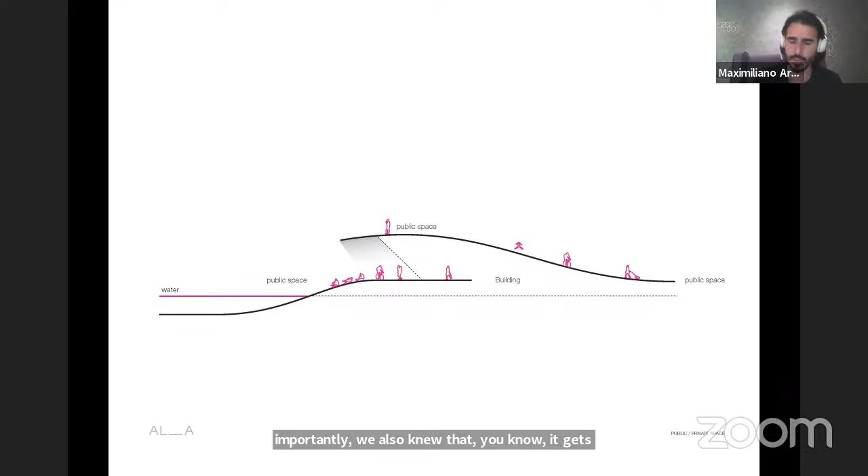But at this stage, there was still something lacking. As we started looking at the project as a topography, it was clear we had to create a diversity of public spaces. One elevated area that could give extraordinary views to the river but also back to the city. But more importantly, we knew it gets pretty hot in Lisbon, so we needed an area of shade, where people would just slow down as they were walking beside the river.

Some of these diagrams helped us understand what we were trying to achieve, and some things were very abstract. How could we capture the light? What was the relationship with the water? There was a clear relationship with views we wanted to address, connecting to the other side of the river, but also back to the city. And clearly there was an issue about circulation.

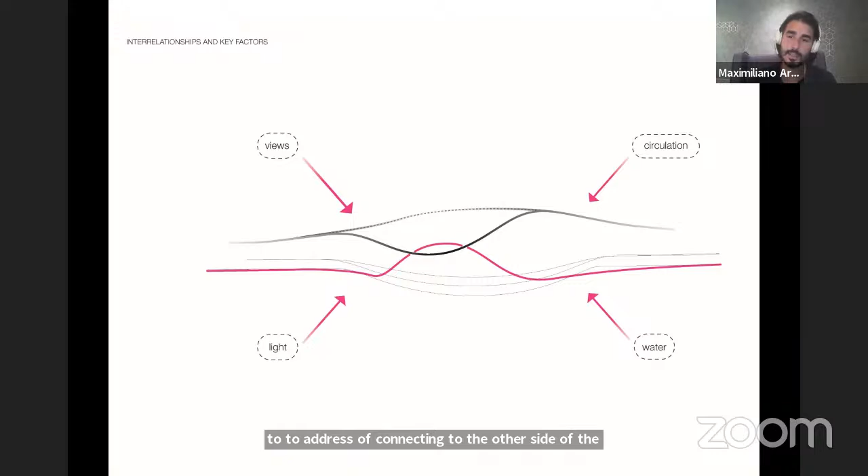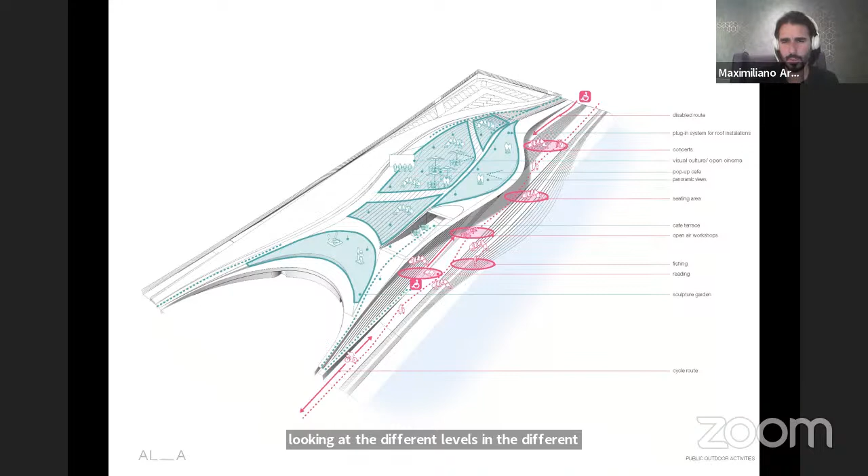We needed to connect the river not only from the top, along the riverfront, but also back to the city. So we started identifying how this could manifest itself, looking at different levels and different geometries, and how the public could start using this. This was before we even started thinking about how the interior of the museum would express itself.

This was one of the images we did at the very beginning. There was a vision of perhaps having an outdoor amphitheater that could even project back to the city, with outdoor cinemas in summer. And at the bottom, at a different level, there are binoculars where you can actually see into the gallery.

Some of these images were still very abstract, and we were trying to understand how to make this a reality, a project that would really consolidate and create a new public place, bringing this area to a different dimension.

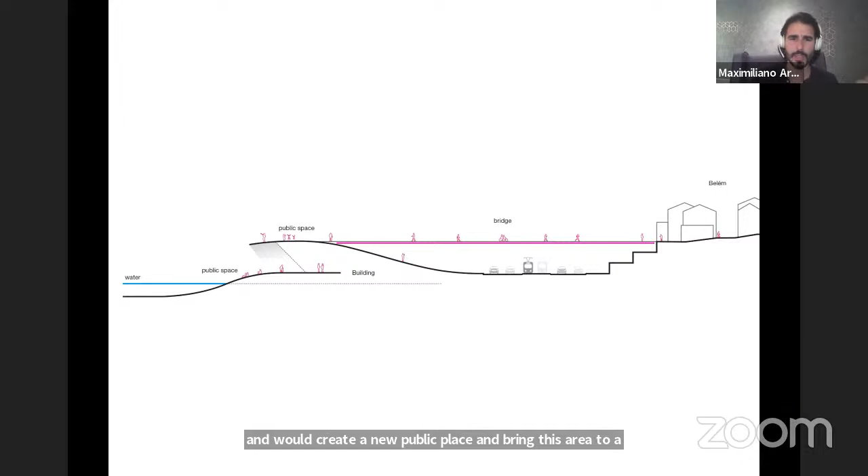I highlight here in pink because at some point we realized the project would not work unless we could make a direct connection using a footbridge to the city. That meant that from the city, at the same grade as you were navigating down the little streets of Belem, you could walk up to an elevated platform. This was really key.

We had to convince both the city and the client. At some point we had to go back to the client and tell them: look, I know you haven't asked for a footbridge, and it will probably make our limited budget even more limited, but we do actually need to try and do this.

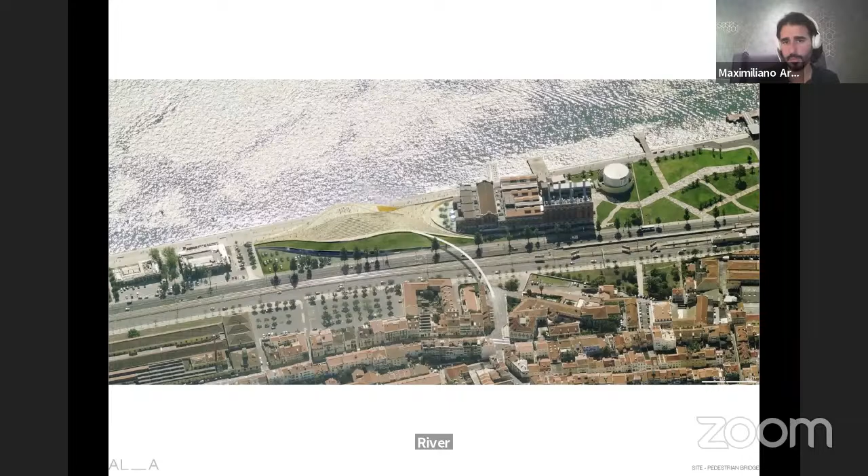So the photomontage then evolved, and then it started to make sense. It started to create a river walk that would connect the city from north to south, but also we would have a direct connection to Belem. So this is an image of the building when it was nearly complete.

We didn't want to do that for several reasons. One of them is because the neighbors behind in Belém had a view to the river that we didn't want to be an obstacle for. But it was also critical to maintain that height so that we could have ramps to access from the river up to that elevated amphitheater or square.

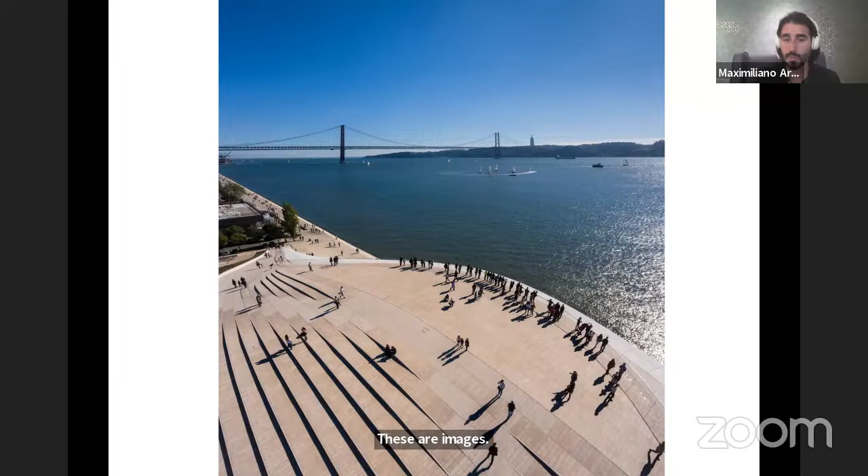These are images of the project completed, and you can see how when you're at the rooftop, you don't really understand that there is a building underneath you. You access this public space, you can see the views towards the bridge, and this is how people started to occupy the space.

So I think one of the successes of the project is that emotionally, it has connected with the people of Lisbon. It's a place where they can go and see the sunrise and the sunset. There's something very particular about being able to see the sunrise and sunset as part of a larger community.

And the steps truly act as an amphitheater. In this case, when you're not looking towards the river, you're actually looking back at the city, and you have these beautiful views of the palace.

Here you can see some of this, this is kind of like the experience that you have. So you're elevated in somehow, and the building connects in both directions. So it's a virtual roundabout, if you want, from a visual perspective.

So this plane was very important, and in this picture from a drone, you can actually see how the bridge connects into one of the main streets in Belém, and how it suddenly all starts to make sense, and how now the city starts to reconnect down to the river. It has truly activated that part of the riverfront.

So this leads to the next topic I wanted to touch today. We did a topography—you don't really understand there's a building underneath you. The materiality, well, you can see it in the images: it's a green roof that then uses the same stone that is used throughout Lisbon.

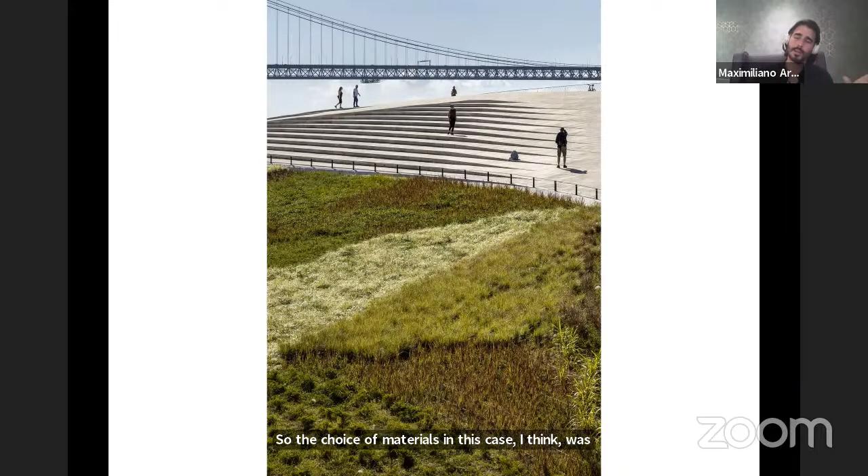This is an image of the bridge, and this is a picture of the opening day. We actually rented a boat, and we couldn't believe our eyes when we saw how many people went to the opening of the museum, and how they occupied the building exactly how we had imagined it.

It was truly a special moment for the office, because sometimes you project how you think people are going to behave, and you work so hard into trying to create public spaces, but it's not an exact science, and it's difficult to measure in many ways. Sometimes you really need to understand the locals and what they expect.

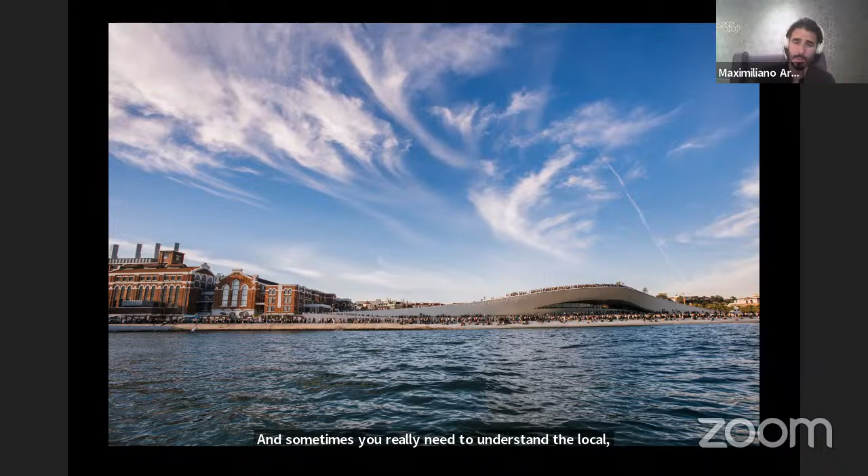In this case, most of these people were not an international kind of audience coming to the museum. They're actually people from Lisbon, particularly because at this stage there was no collection. So literally they just went to see an opening of a building with no art collection at this point.

This is a picture of one of the footbridges that we had close to it, and they actually had to close the footbridge because so many people wanted to access it. The reason this happened is because when the building was opened, the footbridge came 6 months later. So the building existed without the footbridge for 6 months, and this was one of the cause and effects of not having the footbridge in place. This reinforced our notion that yes, we did need a new footbridge.

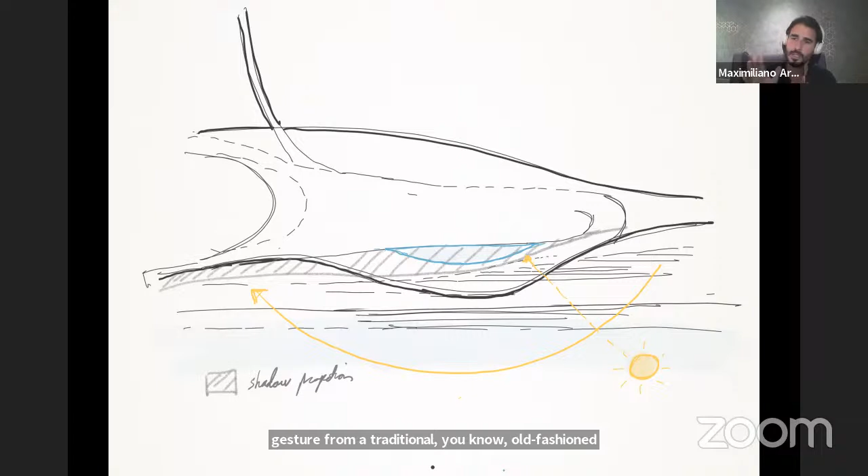Many times I get questions about the geometry of the building and how it was derived, and it's not always apparent unless you explain it. But the building was not derived as a gesture from a traditional, old-fashioned kind of architect saying 'I want to do this kind of curvature.' The geometry of the building was carefully calculated using a sun path diagram and the solar movement.

And what we did is we created software that would allow us to understand the shadows. So we would draw all the shadows, and we started sculpting shadows.

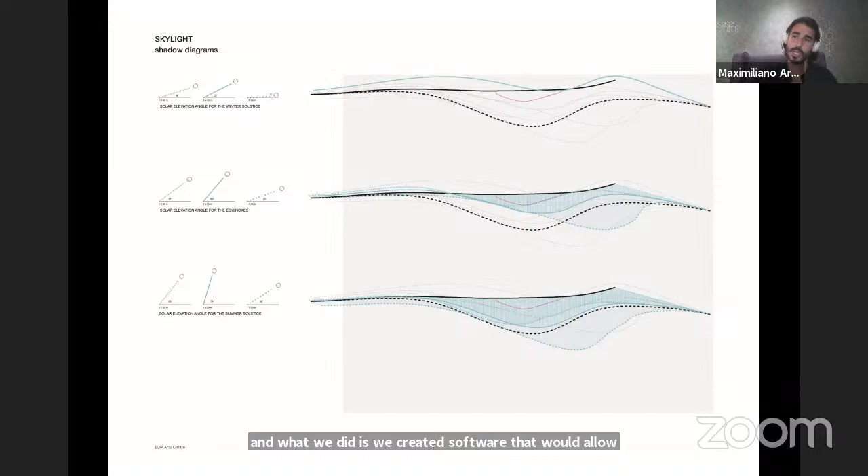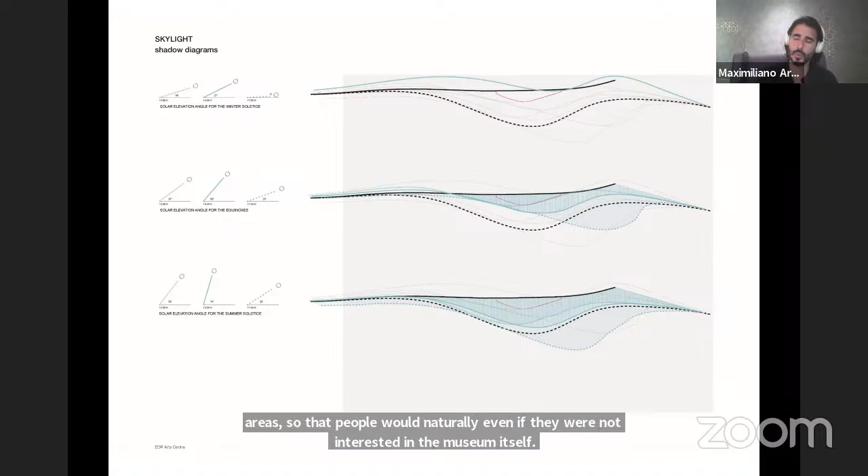And so the public space that's at the level of the Riverwalk, we wanted to create an area of shade, an area that was cooler than other areas, so that people would naturally pause, even if they weren't interested in the museum itself. We wanted people walking along the riverfront to suddenly find an oasis of shade, and then there's an oculus that I'll show you later where people can see into the gallery, and hopefully they will go inside the building.

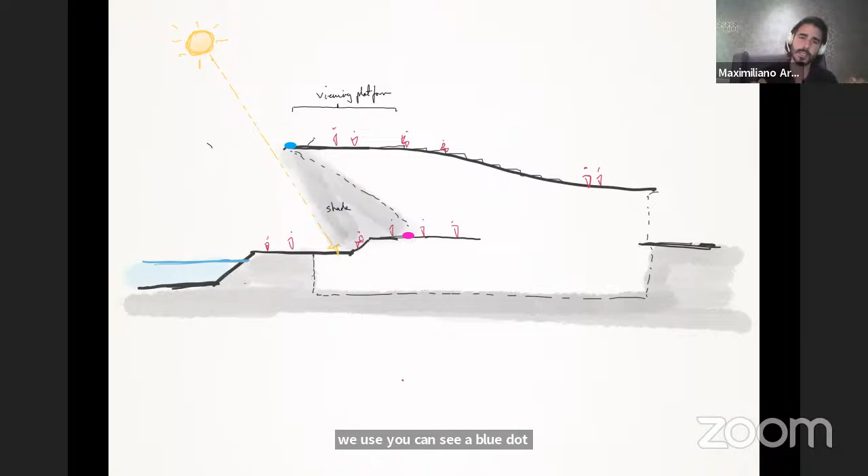So the geometry was really based on the orientation of the building. It's south facing, so by having a horizontal overhang, you create shade, and in that area of shade we started sculpting shade, and that's where we decided the entrance had to be. To generate the geometry, we used a blue dot at the top, the tip of the building, and a magenta dot at the base, at the entrance of the building. The entrance is elevated because the river can flood, so it had to be at a certain height to avoid potential flooding of the area.

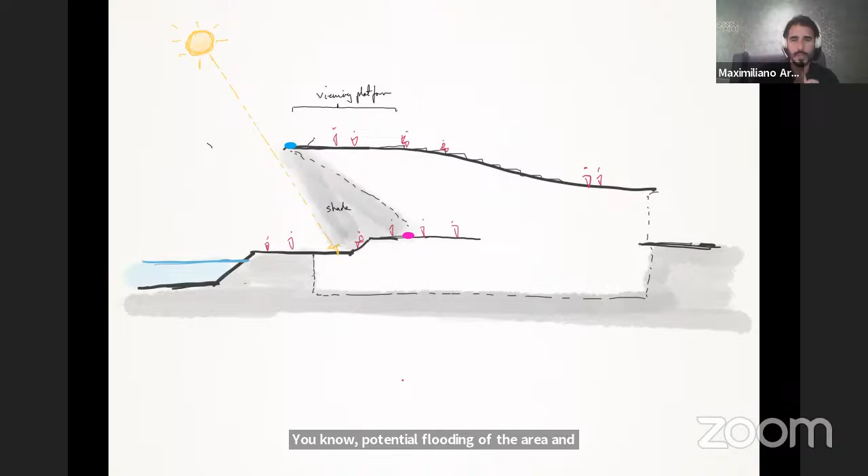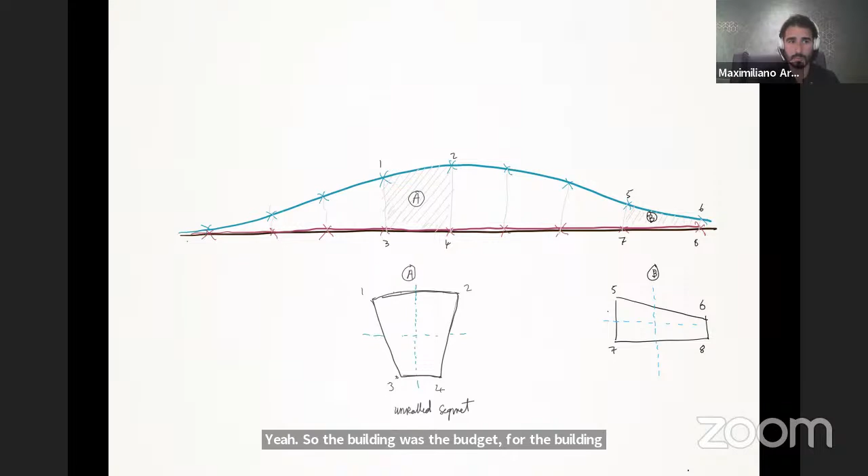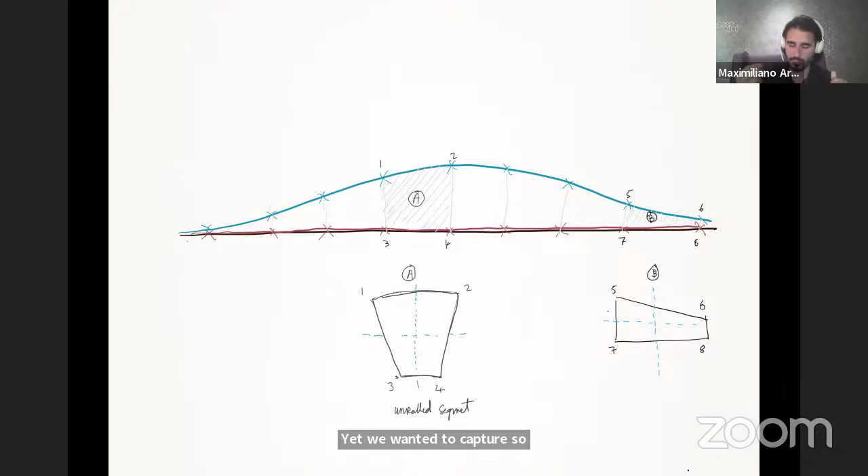This is just to show you the blue line I was showing you before. One of the challenges we had is we had a very limited budget. The budget for the building was approximately 20 million euros, which ended up being around 2,800 per square meter - very low for an international museum. So we were very limited, and we knew from the start we had to come up with a facade solution that was simple, yet we wanted to capture so many aspects of the light quality and the reflection of the river.

So our journey starts with understanding the easiest way to fabricate or generate this geometry. It was evident from the beginning that we had to create a ruled surface, which would allow us to use a series of straight lines, which I'll show later, to come up with a tiling system that would help us articulate everything we wanted to do.

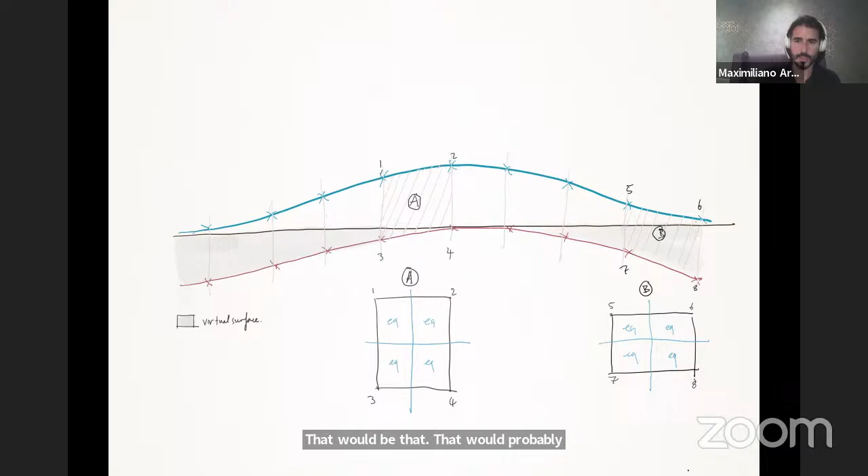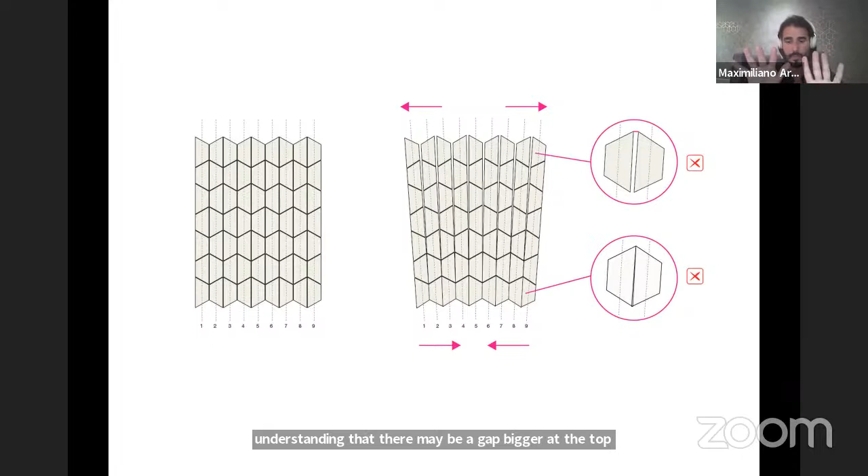Once we generated the ruled surface, we realized construction is not precise, so we had to look at what deviations we might get. We also have a steel structure and a concrete structure, so they move slightly differently. We had to think about the gap between the tiles - there may be a gap bigger at the top and smaller at the bottom - and how to mediate all these differences as we looked at the different geometries we could generate.

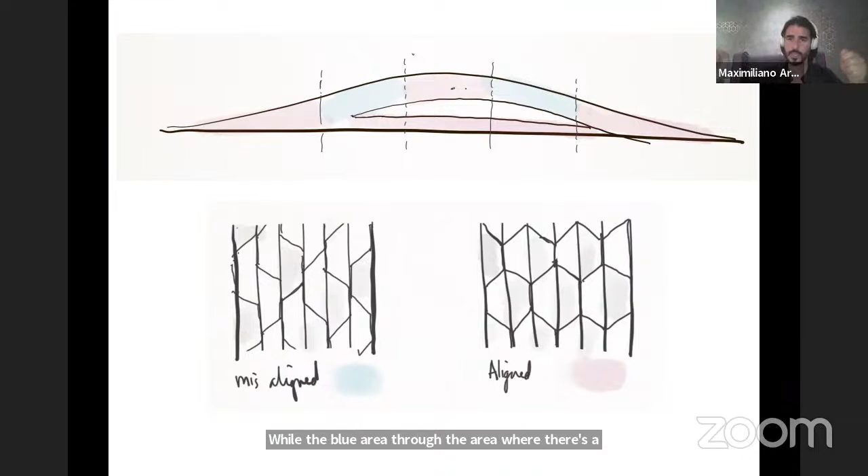The other thing we understood is that the pink areas in this diagram are areas where the pattern is quite aligned, while the blue areas are where there's a transition, where the ruled surface is more pronounced, so there was going to be a deviation in the pattern. We actually enjoyed that - we thought that would be great, because the tiling of the facade could start to mimic the reflections of the water.

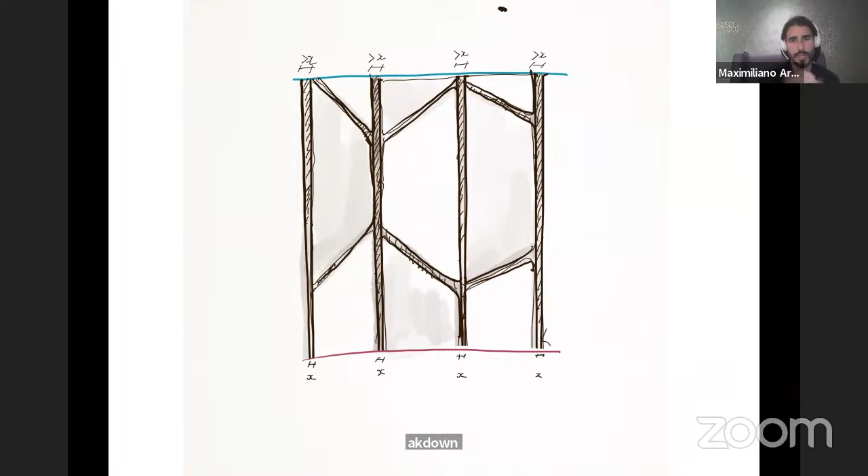So we opted, at the end, for a hexagonal pattern. The hexagonal is obviously based on breaking down the hexagon into equilateral triangles. We did study the option of doing triangular breakdowns using an equilateral triangle, but at the end we opted for breaking the hexagon in half and doing an asymmetrical hexagon, a three-dimensional shape that would also allow us to play with the edge.

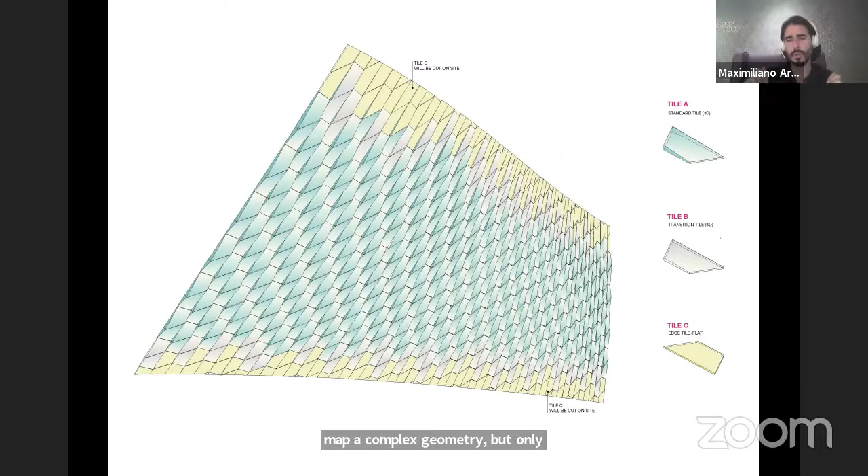We worked quite hard to come up with a system that would allow us to map a complex geometry using only 3 tiles. We didn't have the budget to do 1,000 different tiles - we had a budget to maybe produce 3 molds. So in this case, what you see here are 3 types of tile.

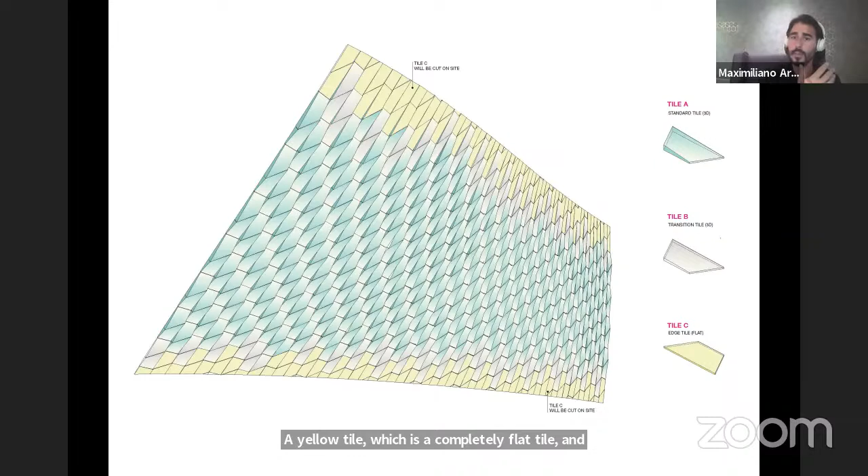The blue tile is a 3-dimensional tile with around 65 millimeters in depth. There's a gray transition tile that goes from the 3-dimensional tile to a yellow tile, which is completely flat. The blue tile and the gray tile are manufactured in a similar way, which I'll show you in a bit. But the yellow tile is a cheaper tile, manufactured using an extrusion mold, which I'll show you in a second.

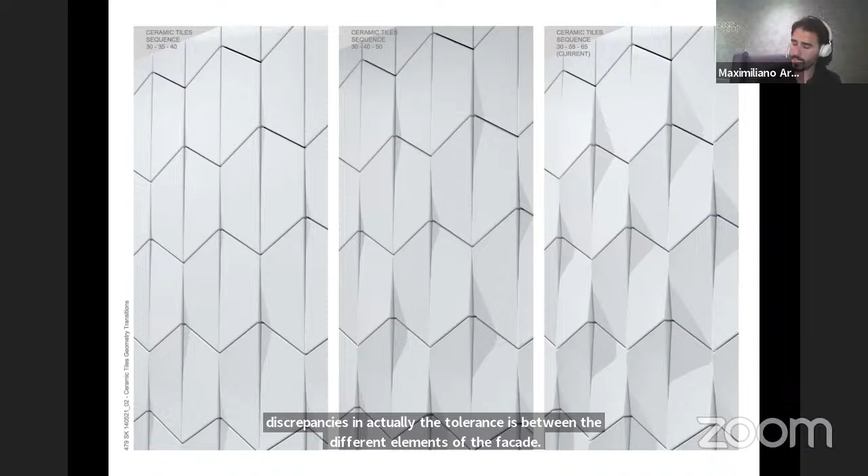The next question we started asking ourselves is, well, we need movement in this facade, because we knew there were going to be discrepancies in the tolerances between the different elements of the facade. So we wanted to exaggerate the three-dimensionality of the facade. Also, because of the orientation of the building, each tile nearly acts as a solar dial.

You can map the shadows, and they create completely different options. So this is a test we did using how three-dimensional we want the tiles, and we opted for the third option, which is the one to the right, the most extreme kind of tile.

So then the question is, well, okay, how do we make these tiles? That was a journey that lasted 2.5 years. We immediately thought of ceramic tiles, because most of the vertical facades in the city of Lisbon are in ceramic. So there's a very strong relationship to the city in using ceramics, and ceramics actually behave very well in this kind of environment.

And ceramics is a universe in itself. The first thing we decided is that we needed a non-porous ceramic. So instead of going for terracotta, we went for stoneware, which is, if you want, in between. It's terracotta, stoneware, and then you have porcelain. Stoneware is still a ceramic that is vitrified, so it's fired in the kiln at around 1,200 degrees Celsius, and goes through a process of vitrification, which means it's a non-porous ceramic.

Unlike terracotta, it's non-porous, and it's important that it's non-porous because it does actually freeze. You can get the odd day in Lisbon where it goes below zero, and then any humidity trapped in the terracotta could make the tiles crack. So it was important to use a non-porous material.

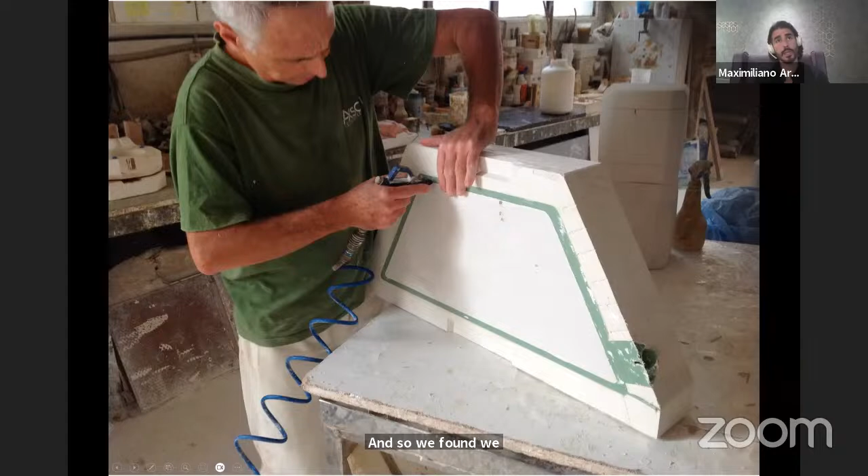We searched everywhere in Portugal, and we couldn't find a company that had the knowledge to create tiles of the dimensions we wanted, because it was important for us to have an oversized tile because of the scale of the building. So we ended up working with a Spanish company, neighbor to Portugal, a family-run business, fourth generation, and they still to this day produce a lot of the ceramics used in the Sagrada Familia, following Gaudi's tradition of ceramics. So they had true knowledge about the material and what they could do with it.

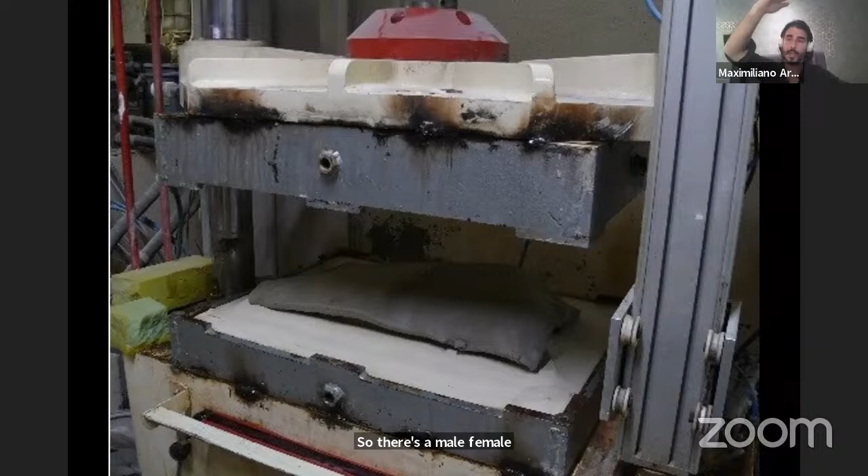This is a picture of one of the molds, the three-dimensional tile molds that we created. And the fabrication process you can see here is we ended up having to use a stamping method. So there's a male-female mold, and then the clay, if you want, is stamped, and this is more or less what you get.

What was interesting is that we realized very quickly that when we left it drying and put it in the kiln, it would deform. Obviously, we then had to come up with a system to support the tile.

So we had to create another type of ceramic, in this case a porous ceramic that you would use as a support. We would first stamp the tile, then put it on top of one of these supports, and then it would go into the kiln and we would fire it. These are some of the pictures of the molds we used to create these three-dimensional tiles.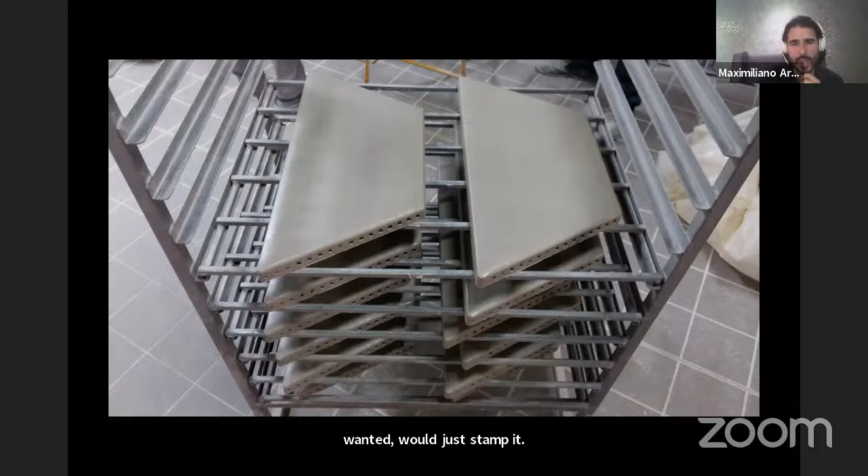So these are the two types of tiles that we had. And these are some of the mock-ups we did, just to start experimenting with different tonalities and different qualities we could find.

We were quite certain from the beginning that we wanted a white tile, but the client wanted us to explore other tonalities. So a lot of these tests were to demonstrate to the client that the quality of light we could get with the white tile was more interesting, because it would simply reflect what was happening around us, while adding any other tonality meant using colors that are recurrent in this area of the city. All these mock-ups were just to demonstrate to the client that our instincts were correct. Sometimes you need to go the long route until you find the right solution.

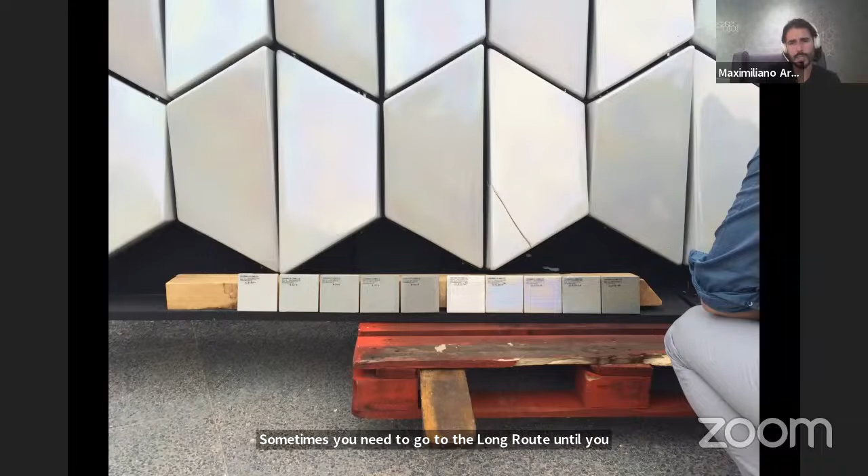Here you can see a wide range of different tests to understand what white we wanted to achieve and what kind of different reflection. Again, these are two different options. One was a white similar to the stone used in the pavements around the city, and the other was using a dark clay with a white glaze.

Ultimately, after all of these tests, we opted for this one. The reason we chose it is, one, it was off-white but slightly earthy, so it had a dialogue with the stone used in the pavements. But what we really enjoyed was this crackle effect. When the light hits it, and because it's south-facing, as soon as you get close you start understanding there's different depth in the ceramic. This is something quite unique that's difficult to achieve with any other material. Every piece looks like it's handmade, and we thought that was very interesting.

There's something fascinating about also accepting that the tiles are not perfect, that there are small imperfections about them. It creates a certain richness in the project. It was important as well for the tiles.

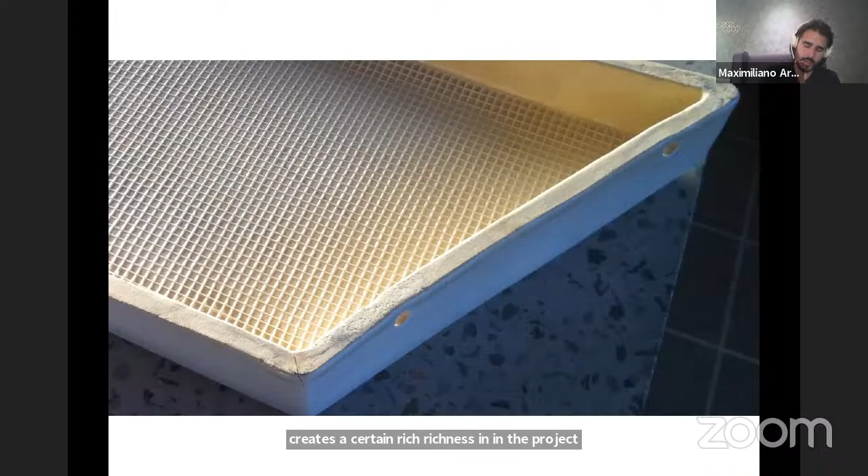We had to go through extensive testing for this system because the tiles started vertically, as they do in any facade, but then the building was twisting, so it was acting nearly more like a soffit. We had to make sure that in case there was a breakage of one of the tiles, it didn't just fall on someone's head. So this is a fiberglass backing that we needed to add to the back of every tile.

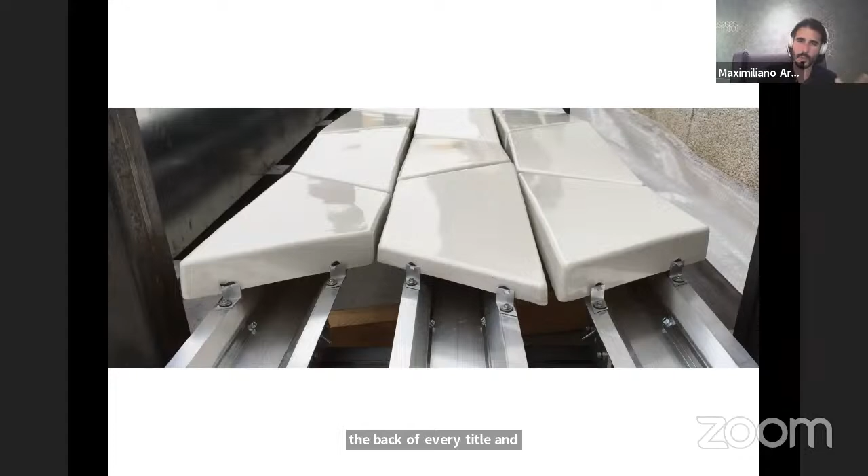This is one of the mock-ups of the system, how we decided, we did different tests on how the tiles could be mechanically fixed to the aluminum structure behind it. This was the most successful one, so this is the one we ended up pursuing at the end.

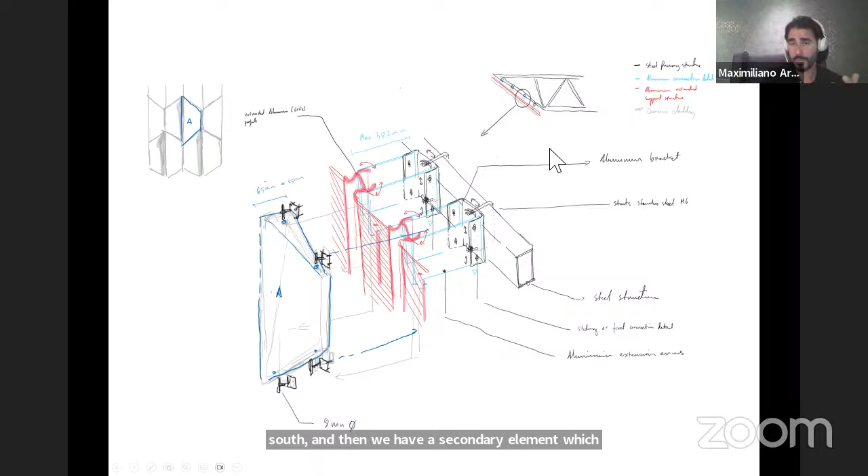There's an added complexity to the project, which is that we had to deal with the different rhythms of the building, which I'll explain. We have a primary structure, which you can see here - big three-dimensional truss structures running north-south - and then a secondary element, an aluminium element, which picks up the facade. The arms are of different lengths, and then we would hang the tiles.

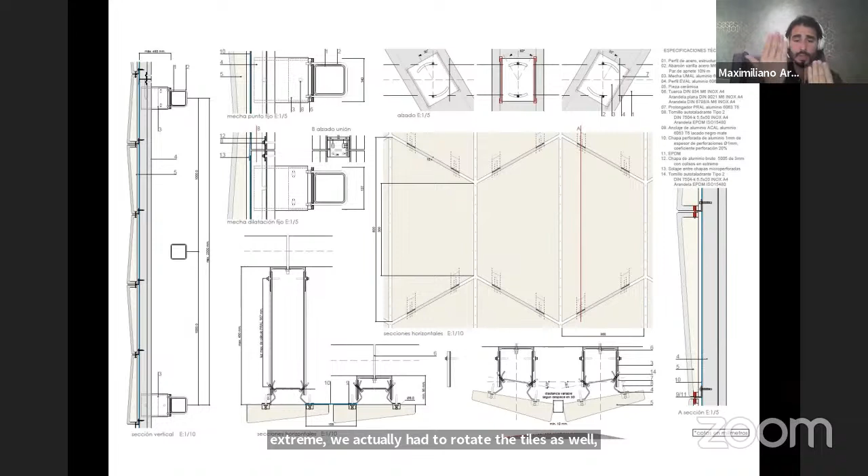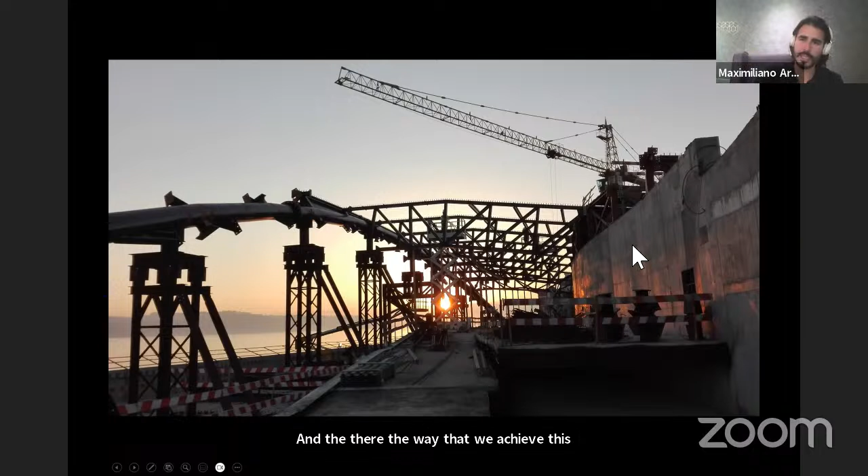I think it's easier to show you in photographs. This is the rhythm of the steel structure. We managed to create a building that effectively has no columns, and the way we achieve this - you see a concrete wall here. That concrete wall is part of an elliptical concrete structure which forms one of the big elliptical rooms, the main room of the museum.

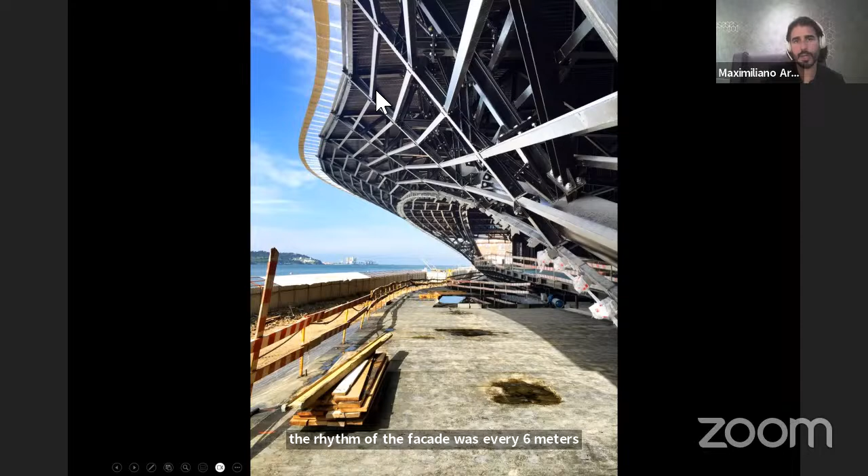Then you can see here we had some trusses spanning to a tilted arch - these are temporary structures, removed later on. From that tilted arch, you would have an overhanging structure that allowed us to have that big overhang I'll show you in a second. The rhythm of the facade was every 6 meters, so we would use straight steel sections every 6 meters, which created a deviation between the original surface we wanted to follow, the ruled surface, and the steel structure.

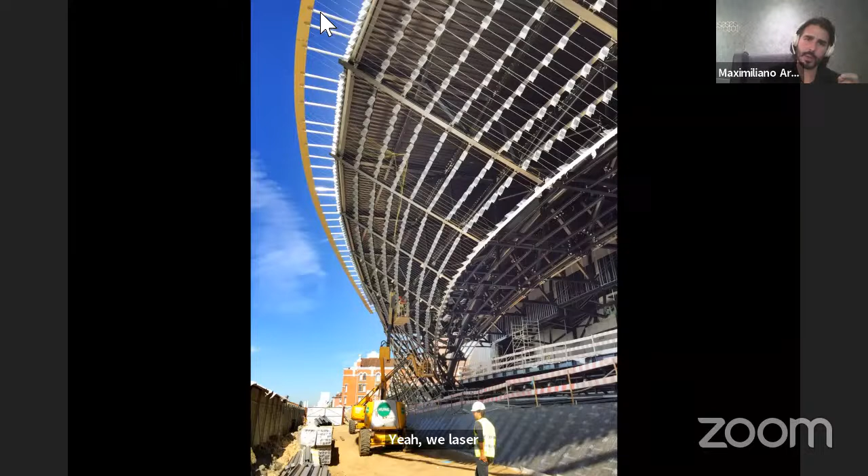So then we used, I like calling this a very low-tech way of making sure that you can build a facade in a complex geometry. We basically used those aluminum panels you see at the top here. We laser cut these, and they had the perforations at the right rhythm, and then we literally used strings to make sure the roof surface was following what we had designed in 3D.

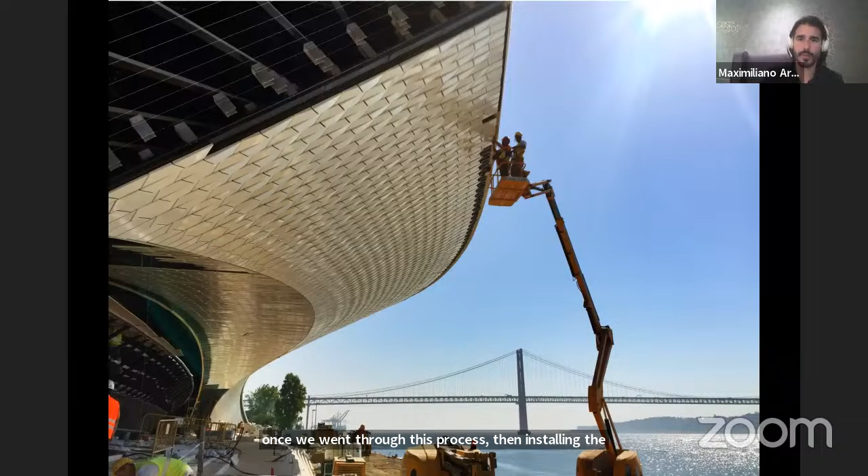And then the tiles at the top, you can see, are flat. They were cut on site. So we would take a measurement—they were oversized—and then we would cut to the measurement so that we could follow the curvature as precisely as we possibly could.

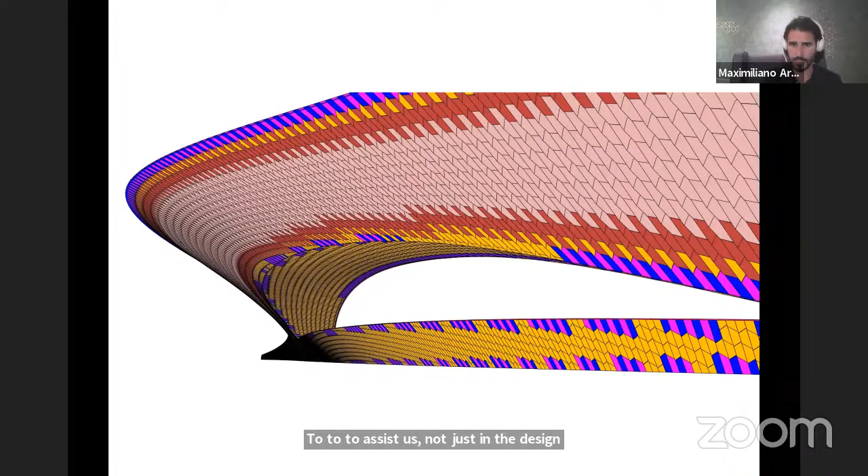We used different technologies in our office—we've adopted all sorts of them. We write our own scripts, we make models, we really use every tool we have in our hand to assist us, not just in the design, but also in the construction. So unlike many design offices, we generally are very proactive, and we follow construction throughout. We're usually on site as well, since construction is a fundamental part for us.

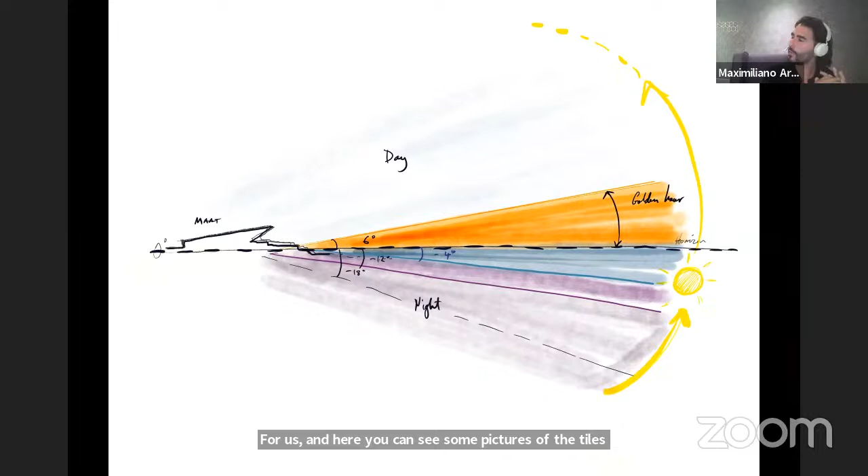And here you can see some pictures of the tiles as they were installed. And I like this diagram because it's a diagram that we did—it's not 100% scientific, but we developed it by simply being on site and observing what was happening to the light.

We traveled to the city for 7 years, so by the end of the third or fourth year, we had a really good appreciation of the colors we were getting. There was this 6-degree angle, which was the golden hour that happened in the mornings and evenings. And then there was a moment where the sun went below the horizon but you still got this blue tint, this very bluish facade, and then it was nighttime, and then you would have the daytime.

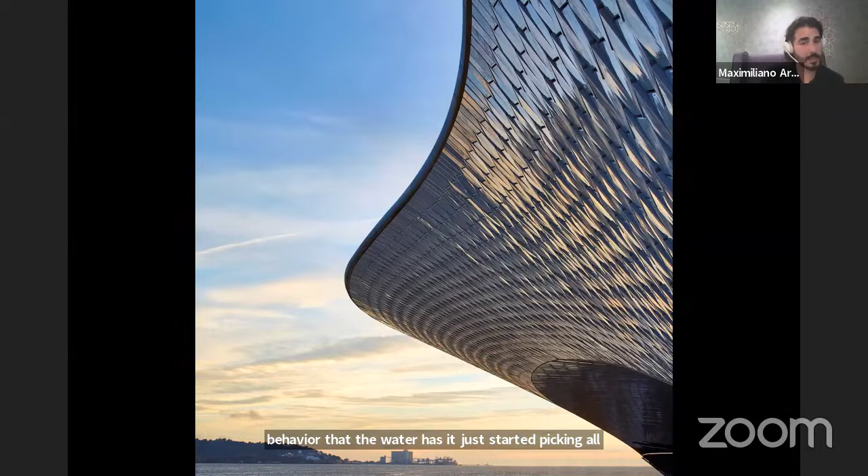I think these photographs demonstrate that we were able to capture all of these different colors—it's effectively mimicking the same behavior that the water has. It just starts picking up all the colors of the sky. Sometimes people pass at different times of day, and I've received calls from friends saying, oh, I saw the museum, it's great, I love that you did an orange building. And I tell them, no, the building is white—it's just that you happened to be there at a specific time. Other people tell me it's a beautiful silver building. It just really changes.

And I think the project was quite successful. We tried to capture what the river did, and we found a way of capturing all those kinds of qualities that you get.

And then another element that we didn't really design, but it just happened—the geometry that follows the sun at a specific point acts as acoustic reflectors, and there are moments where, going up the ramp towards the entrance, you can actually hear the water in a very peculiar way.

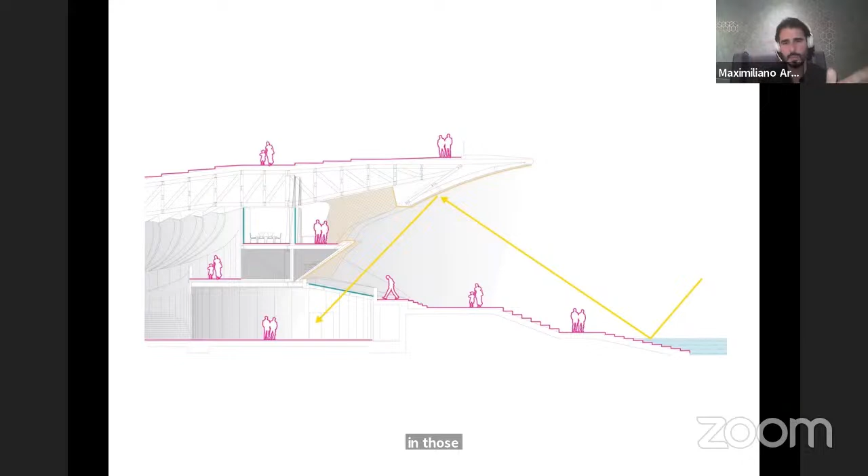I won't dwell too much on the museum interior. There are different areas that are effectively an extension of the topography, and there's this huge oval space used for all types of exhibition. It's very malleable, a type of space they didn't have in the city, so it's unique. Artists have appropriated this space, and if you look at the Instagram page of the MAAT, you'll see they've used it in ways we couldn't even have imagined. I think it's been quite successful.

I think this is the end of my presentation. Hopefully I've covered most of the questions you had about the project.

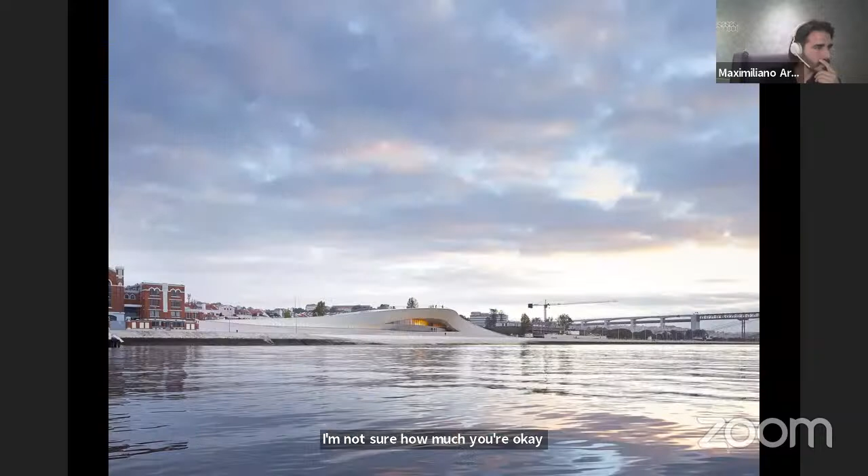What I was saying before is that Belém is not really close to the center of the city. The center of the city is considered to be where the Plaza de Comercio is. The city used to be connected to the riverfront all the way from the Plaza de Comercio to Belém. The big issue the city had when we started working on the project was a disconnection from the riverfront throughout its full extent, so it was only really touching the River Tagus at the Plaza de Comercio. This was one of many projects the city of Lisbon had in mind to reconnect back to the river, so we were another stone in that effort. There's a series of projects running from Plaza de Comercio, including the Expo area, and a lot of new projects have since been completed that have regenerated the route back to the river. We definitely helped reconnect the area of Belém and the riverfront. Beside us there's not just the MAT Museum but also the Museo de Coches, one of the new museums by Mendes da Rocha. I think our project was critical in the reconnection of the city, but it was one of many projects. The city had a plan called the Arco Ribeirinho, meaning the Arch of the River, which promoted all projects to do something similar to what we did. So I'd say we're a success story, and there were other success stories too. I think the municipality of Lisbon and its mayors have done a great job regenerating the city.

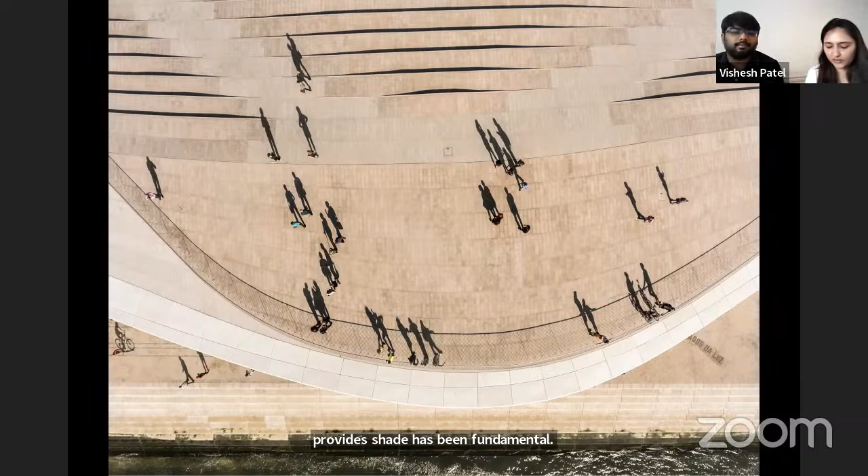How does the site attract crowds, and how does the MAT building instigate activity? What different kinds of uses and events are enabled by the civic surfaces of the MAT site?

Actually, I think part of the success of this building is that it doesn't need to be programmed to be successful. No one programs it, you don't need someone to actively program things for people to go there. People just go there because it effectively acts like a three-dimensional roundabout. If you're on the riverfront and want to go to Belem, you have to go through the roof, and if you're in Belem and want to go to the riverfront, you have to go through there. And because, as I said before, suddenly you find yourself in an amphitheater, suddenly you find places of urban comfort, and as soon as people start gathering there, it's just because it's comfortable.

It immediately creates community. I think it's a hotspot for skaters as well, I think skaters love it, and probably they're being chased off, but I've definitely seen skaters and people cycling up and down the facility. But I think the success is that you don't need to program it. The MAT, however, has had different artists having interventions outside. For example, if you see in this image, there's a floor box, it's there because we knew they might want to put a pop-up bar or an art installation. So there is the possibility of having art installations, and they have had them. Obviously when there's an art installation, it attracts people, but as I said, the fundamental success of the building is that it doesn't need programming to be occupied.

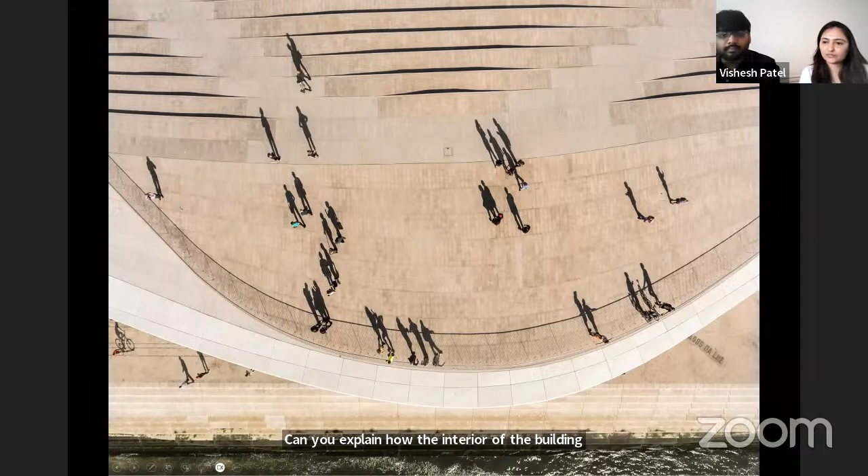Yes, and I apologize because I didn't bring any slides to show you how it works, so I'm going to have to describe it for you.

The whole project is a complex network of ramps. We have ramps to go to the top of the building, and different levels. There's the main level, the level of the Riverwalk, and then a level above the Riverwalk where we established the entry of the museum, elevated to avoid potential floods from the river. Once you get to that level, we slowly start ramping people down.

As you ramp people down, you have an option to go in two directions, and that's where the big oval kind of space starts. As you go on the perimeter of this oval shape, one is a very long ramp that takes you to the back of the oval, to the opposite side, and the other is a generous kind of stepped area.

Once you're in the oval, there are different connection points to different parts of the building. All these spaces are hyper connected, and before you know it, you're in a different level because we're using ramps.

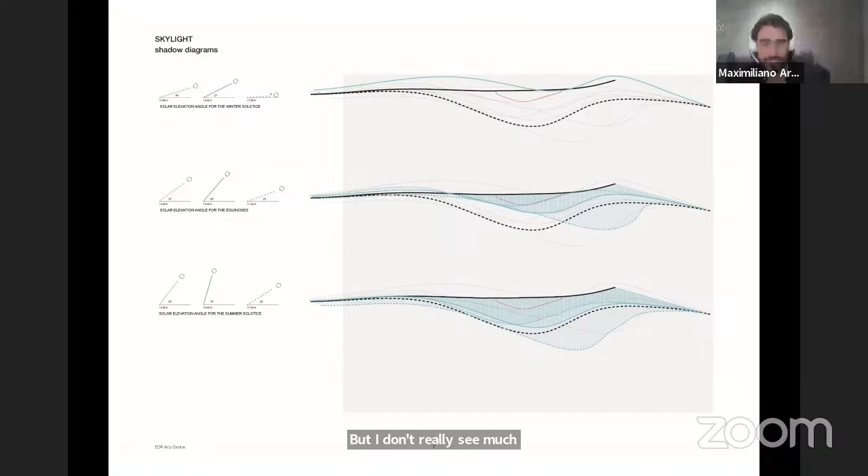And the equilateral triangle can then be decomposed, as the hexagon is decomposed into equilateral triangles. When we decided to make the shape three-dimensional instead of planar, that gave us the opportunity to use a hexagon split in half and made three-dimensional. So I think the fundamental of how you look at light and how it plays with platonic solids is actually the way that we perceive platonic solids. Most platonic solids have the equilateral triangle as their base geometry as well, so we're not really far off. I don't think there is such a thing as modern geometry versus classic geometry. I think geometry is a universal language. We probably have tools now that allow us to explore things with more complexity, but I don't really see much difference in the appreciation they had perhaps 100 years ago of how light plays with geometry, compared to how light plays in the geometry that we did in the MAT. I personally think we probably should go back to studying a lot more classic geometry in architecture, but that's a different story.

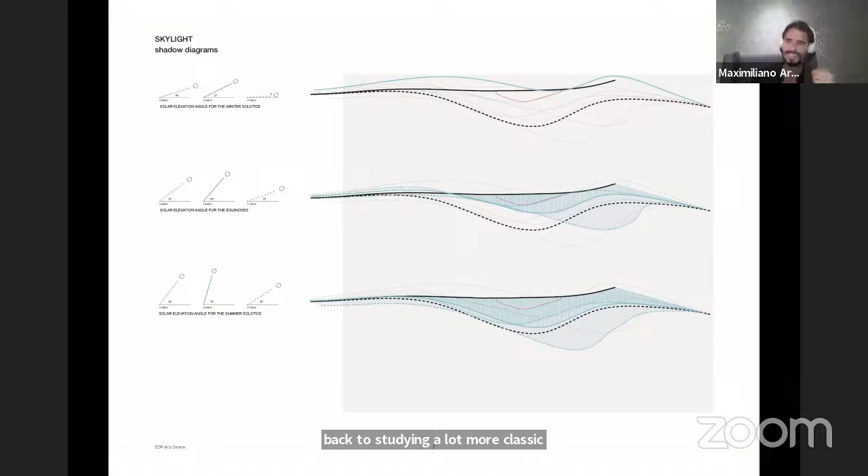Can you please summarize again the flow and movement of the sun path over a day, and how the large overhanging canopy at the waterfront has been designed to create shade and civic space in the hot summer months?

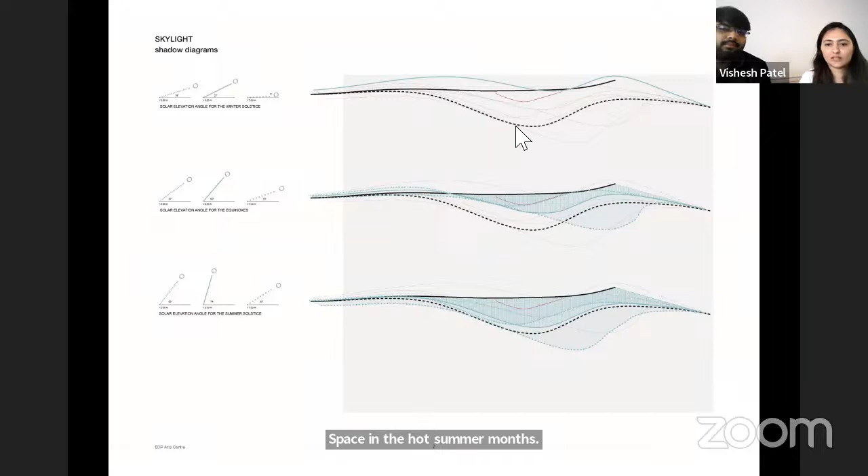I'm not sure if you are seeing what I'm sharing. Are you seeing what I'm sharing? I'm sharing the diagram with the projected shadows. Is that what you're seeing?

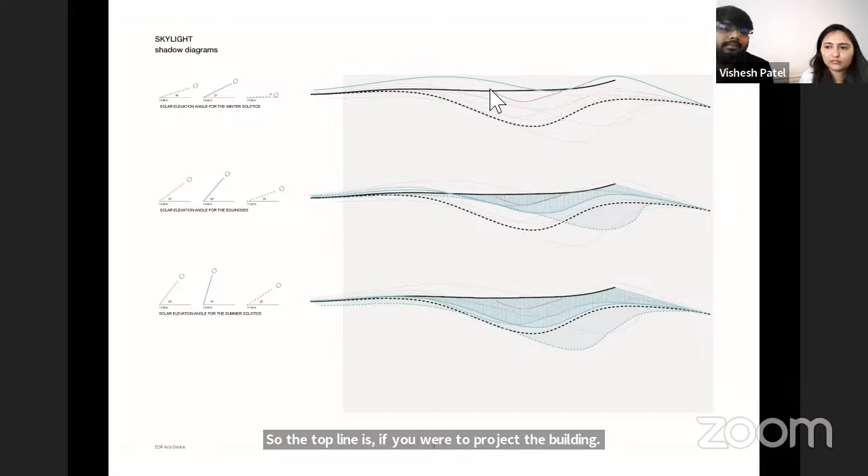So the top line is if you were to project the building, that's the entrance. The pink line here is the line of what we call the oculus, that big skylight that connects the gallery to the inside and outside. So this is a projection of those elements.

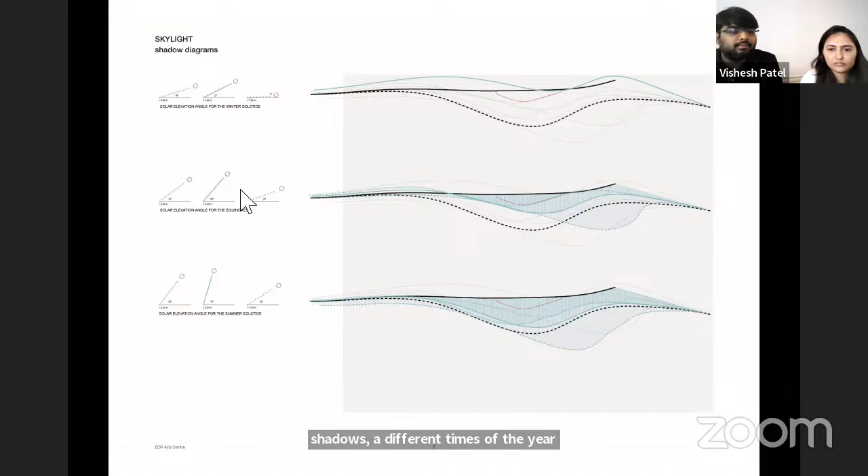What you can see here are the different projections of the shadows at different times of the year. We have the winter solstice, the two equinoxes, and the summer solstice, and you see how the shadows project differently.

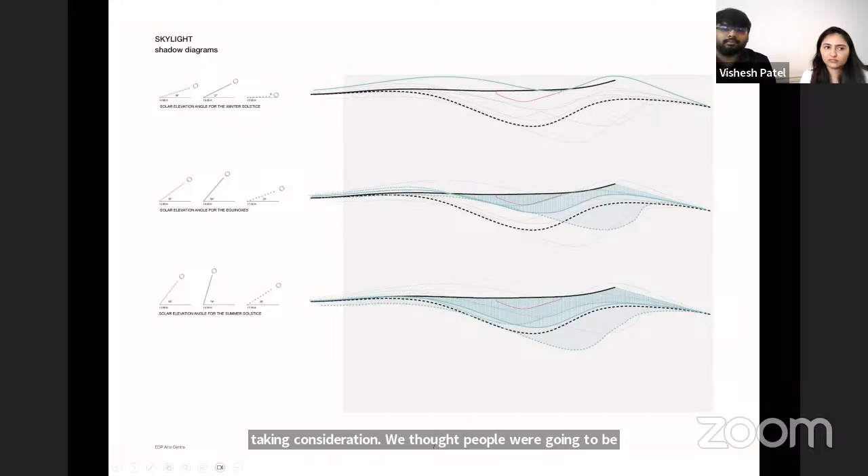The entrance is to the left, where you see the projection of these shadows. Obviously the sun goes around, but we also took into consideration when we thought people were going to be in the museum itself. So I would say that the whole front of the project was using shadows — we were sculpting with shadows, if you want, which I think is quite a poetic way of understanding how we did it.

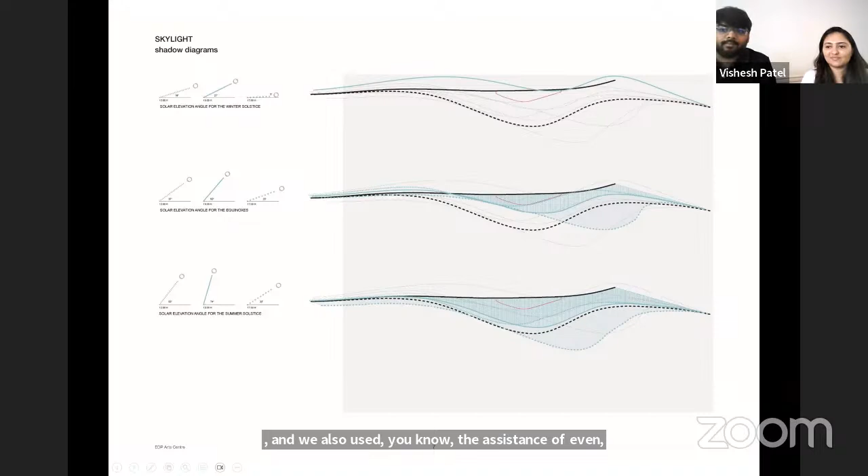And we used models, and ultimately we also used the assistance of even early virtual reality goggles to try and understand and see what we could do. But it was truly sculpted using shadows.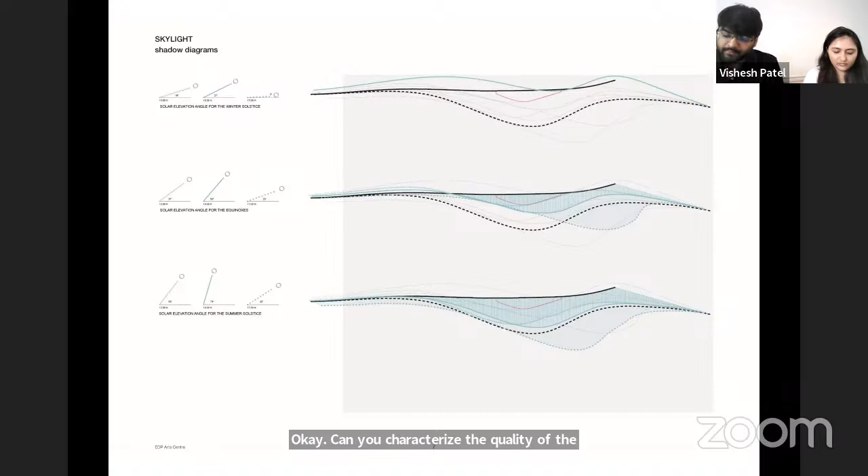Okay, so we would like to shift our discussion towards the space planning of the museum. ALA deployed the geometry of the figure of an ellipse as a space planning device. Can you characterize the quality of spaces created, and explain how the flow of crowd interacts with exhibition in these special elliptical spaces? Yes.

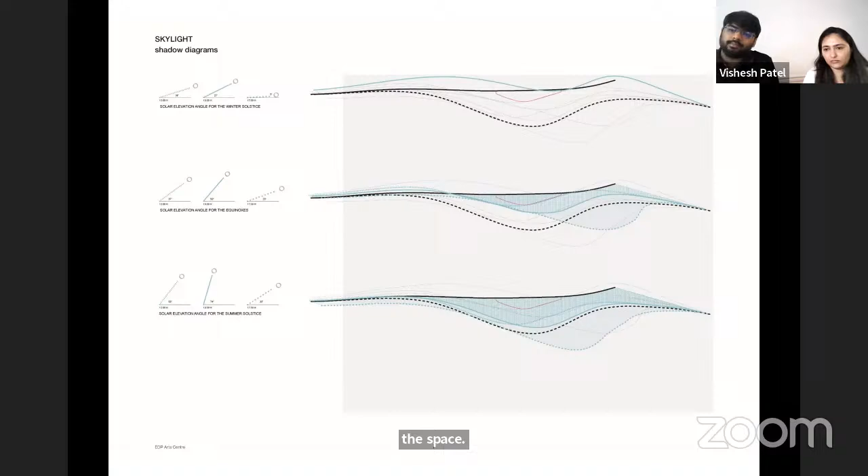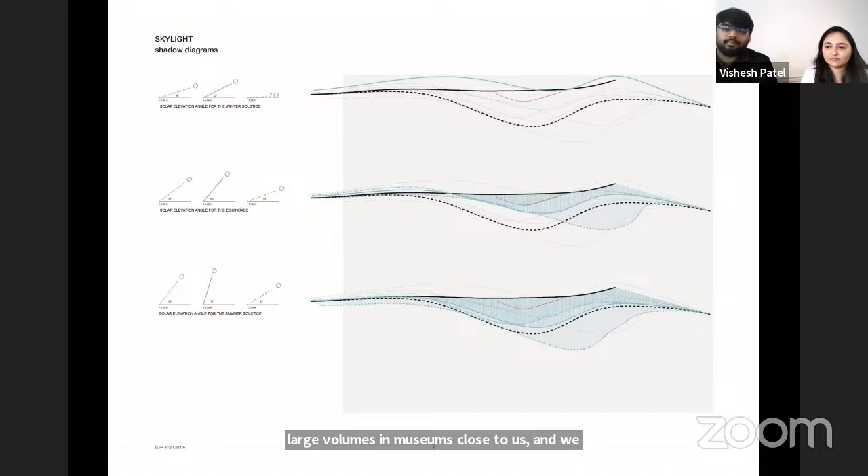So we had a lot of discussions on the geometry of the space. Part of it was to create a new type of gallery space that didn't exist in Lisbon. So we analyzed all the museums that existed in Lisbon, including all the spaces in the existing building neighboring us, the original Museum of Electricity. There was a large number of orthogonal rooms with large volumes in museums close to us, and we tried to imagine what kind of space we wanted to create.

One of the things that was interesting to us is that when you're trying to generate an ellipse, you use two focus points. If you have a circle, you have the center, and with the radius you can derive the circle. But when you create an ellipse, you actually have two focus points.

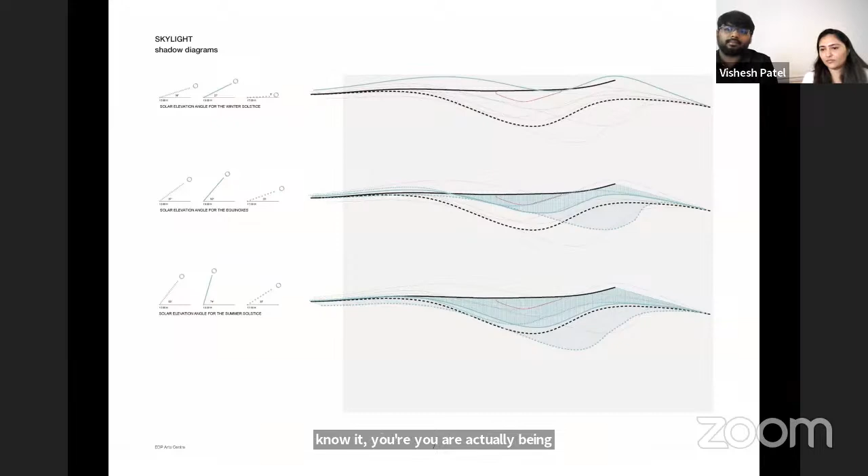One of the interesting things is that you actually enter the building at a slightly higher level. As soon as you enter, you start to ramp down, and before you know it you are circumnavigating the space around the ellipse, experiencing the space at different heights. You start at a higher vantage point, but by the time you circulate around the ellipse, you are at the lowest point of the museum.

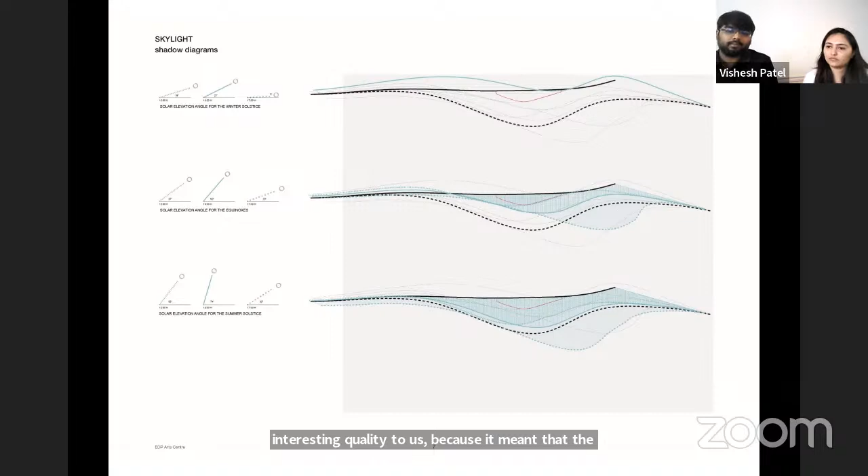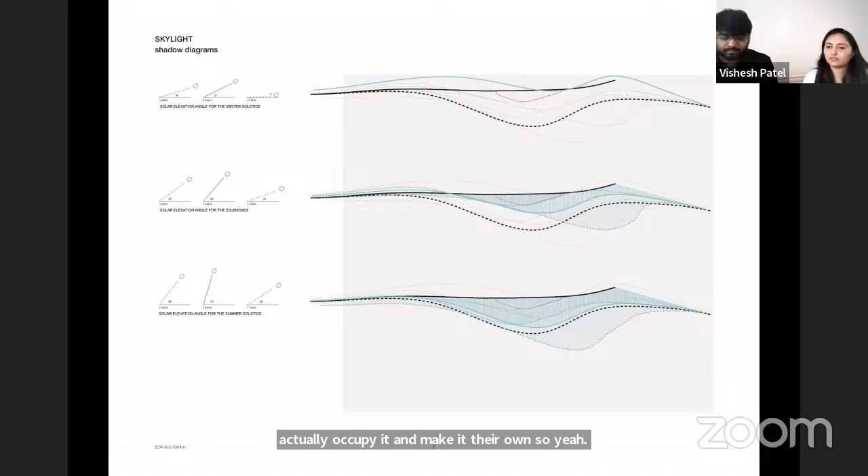That was a very interesting quality to us, because it meant the artist could occupy that large volume, and you could see it from different vantage points. We thought that was very interesting, and after conversations with several artists, this could be a really interesting base for different artists to look at different objects in a place where they could occupy it and make it their own. So the rationale — we tested many geometries, but the oval geometry was really an important one.

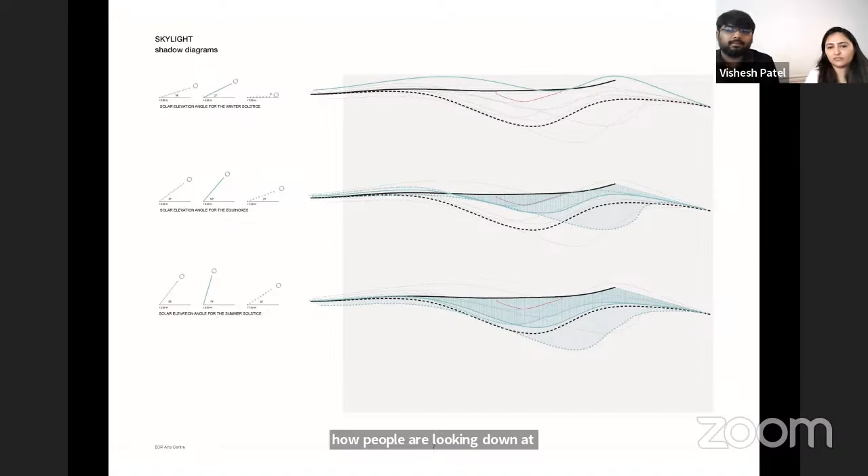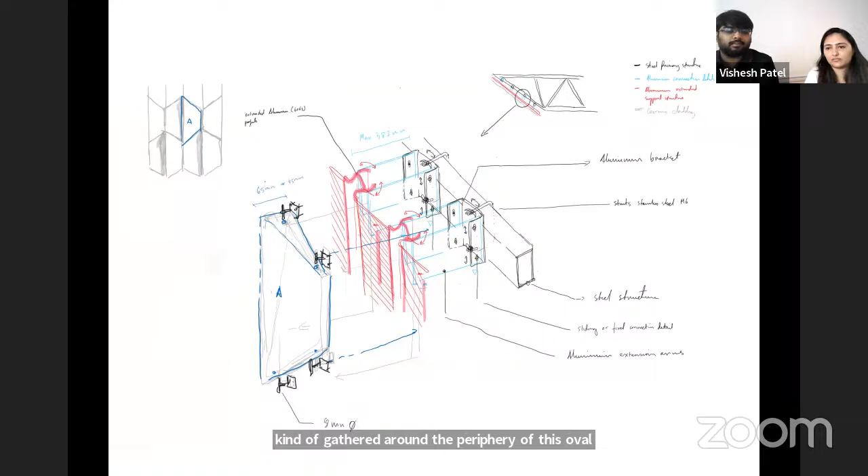Can you share with us the distinction between this elliptical space planning of galleries and a more traditional model of museum organization, in which a series of boxes are arranged in a sequence?

So could you repeat that question again? Can you share with us the distinction of elliptical space planning of galleries to a more traditional model of organization of museums, in which a series of boxes are arranged in a sequence?

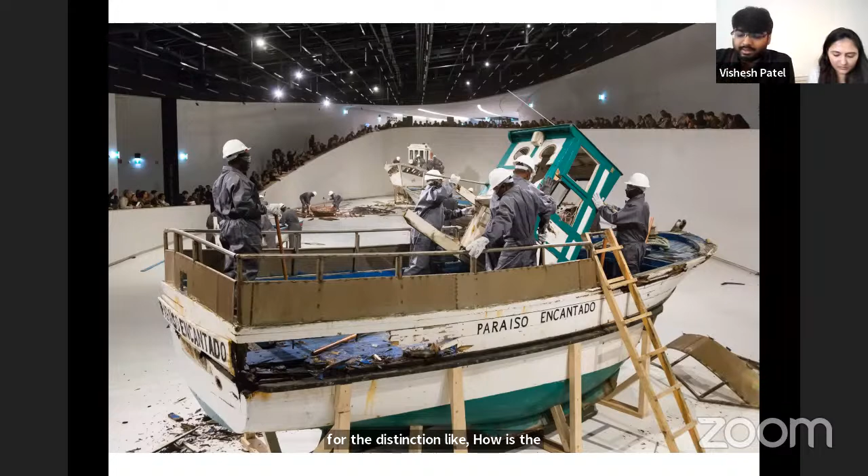I really apologize, I missed the first three words of your question, so I don't want to answer incorrectly. If you could just tell me the first three words, then I'll be able to answer. It's like I'm asking for the distinction, how the elliptical space planning of your gallery is distinct from the more traditional ones, where we have a sequence of boxes for the museum space.

Yes. We didn't plan the elliptical space as a traditional gallery where we imagined people using the walls to display. We really imagined it as a spatial exploration of that elliptical space. The ellipse has two focus points, so we imagined what would happen if an object was in the center - where was the focus, where were the visual lines going?

In this case, we drew an ellipse that has two focus points relatively close to each other, and we tested using different objects of different sizes and different configurations. So the planning of the elliptical gallery was not done traditionally.

We really explored all sorts of different configurations. It's really good if you go to Instagram, to the MAAT Museum page, you can see that sometimes you can't even recognize how they've subdivided the space, but it's all based on this dual focus point. I think it's been very successful - artists enjoy the space and appropriate it very well.

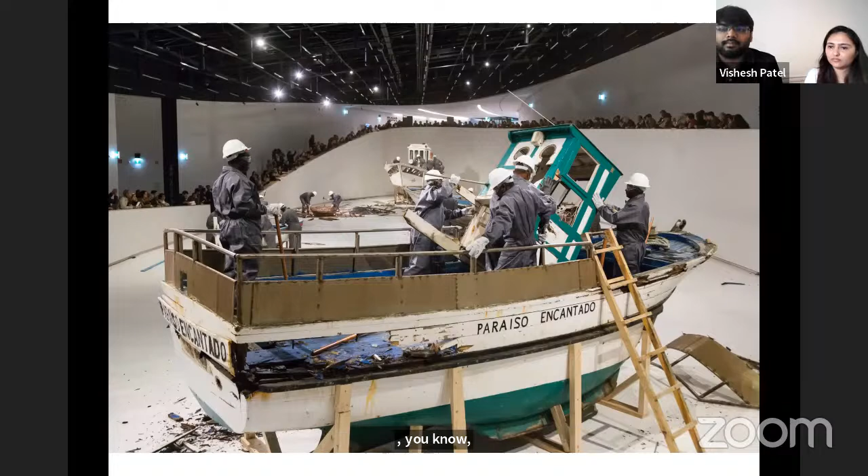There are two projects where we explored with ceramics - in that case it was porcelain, because the V&A has a huge collection of porcelain, and even in the interiors of the V&A you see exquisite examples of porcelain-clad staircases, a master class in ceramics. We also went underground at the V&A for completely different reasons, but we also excavated. So effectively the two projects have a lot of parallels between one and the other.

The language is another parallel - the V&A could only be in London, and in the same way the language we generated here in Lisbon, this architecture can only be in Lisbon, very much rooted in the place. Both are rooted in the place. There are so many parallelisms between one and the other that it's difficult to know which one influenced which and at what stage. I think they grew together - that's why I call them siblings.

Both the V&A extension and the MAAT were our two biggest projects for ALA. They were very much the exploration of the architecture that evolved, and it started really marking the difference between future systems - we used to be Future Systems, then we morphed into ALA. There's definitely still a huge influence of Future Systems in many things we do. As an office, our root is Future Systems, but with the V&A and the MAAT we developed a different way of looking at architecture.

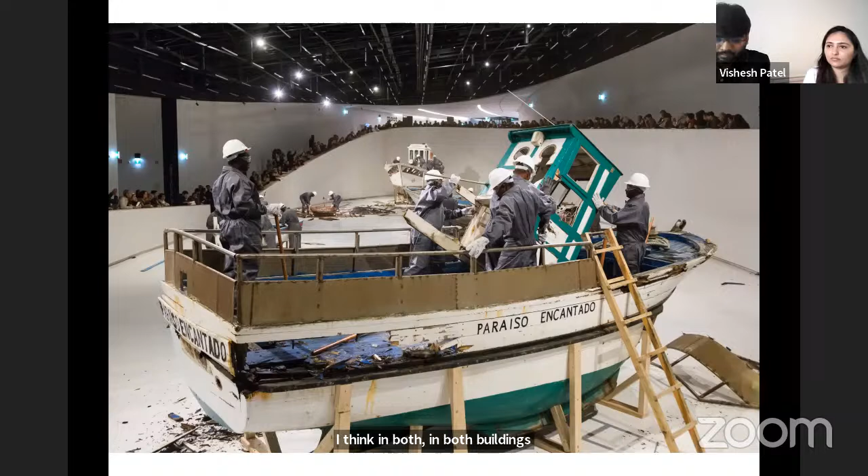So, for example, the museums, right? The way that we think of museums was stagnated for many years, and I think in both buildings we managed to push the boundaries of redefining what the spaces in a museum need to be. Similarly with public space, I think we've taken both cases very, we have been allowed in many ways to push boundaries of what public space is and how we should look at public space.

So the MAT project was completed 7 years ago. Can you please share with us how the MAT project, both as a museum and as an urban design project, has influenced the recent and current work of ALA? In broad terms, what's the impact of the MAT project on your practice and the more recent portfolio of work?

Well, the project that I've been working on for the last 3.5 years is a fusion demonstration plant. So it's quite difficult to find parallelisms, but actually there are. The way that we approach materiality, it's always the same. Hopefully I'll get a chance to share that project with you in the near future, and if I'm invited again, I'll be happy to give a lecture on it.

I think the way that we approach materiality, our exploration with materiality, understanding of sustainability, and understanding of how people flow through spaces - the MAT gave us the confidence that our slightly alternative way of looking at things was successful. So it has definitely influenced the way that we think of design, but what we don't do is replicate the type of architectural language that we developed for the MAT. We will never do a project that has the same kind of architectural language, because, as I said, it's unique to this location in Lisbon. So the influence is at a very deep level, not at a superficial level.

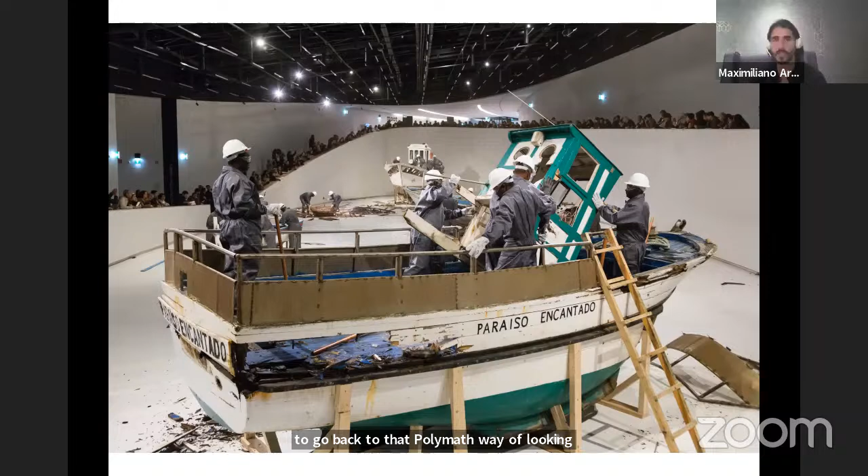And I think we have a challenge, a real challenge. I think the profession will change dramatically. I've been playing a little bit with ChatGPT, and I suspect that you all have, and I just think it's going to be... things will change very much in the next 10, 20 years. And I think the role of the architect will need to evolve, but I think there are certain values of the classical notion of the architect that are still valid today. And I think it's our responsibility to face up to the challenge of bringing back some of those notions.

I think you are all graduating at a very exciting time, a very difficult time. But that's part of the profession that we've all selected. It's fascinating because it works at so many different levels. But it's definitely a fascinating time to be alive.